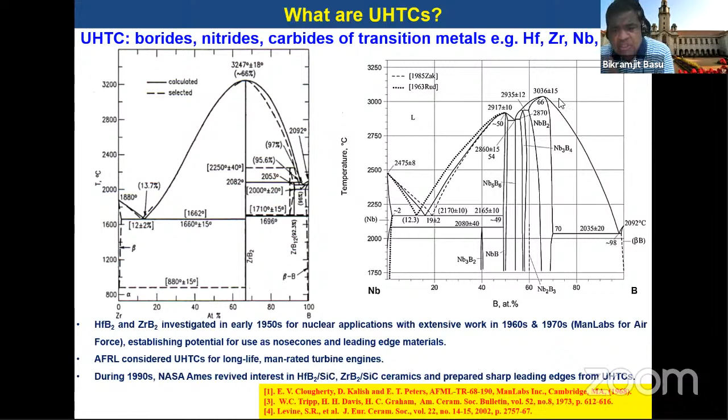made up of transition metals like zirconium, hafnium, niobium, and tantalum, for example. These are two particular phase diagrams I'm showing, just to illustrate what I'll cover in the next 10 minutes or so, the zirconium diboride system. In the ZrB system, zirconium diboride is almost a line compound, a stoichiometric composition of around 66% boron, with a melting point above 3200 degrees Celsius. Another material I'll show is niobium diboride, which is strictly speaking not a line compound, and has a melting point over 3000 degrees Celsius. These are the two materials I'll show you in the next couple of minutes.

Having said that, let me show you the national landscape, particularly ultra high temperature ceramics in India.

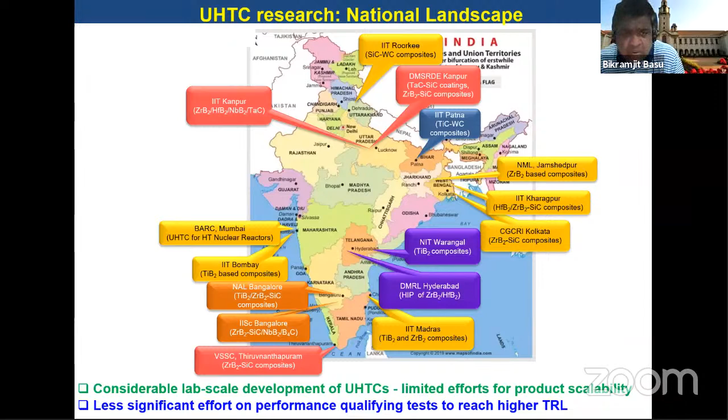I tried to put together some of the important groups at different Indian Institutes of Technology and national labs, space ISRO labs (Indian Space Research Organization), as well as some NITs (National Institutes of Technology) in India, where people are working on different types of ultra high temperature ceramics like hafnium diboride, zirconium diboride based materials, and titanium diboride based materials.

Current materials used, like ceramic matrix composites or reinforced carbon-carbon composites, have a temperature capability of 1650 degrees Celsius. A better choice, we believe, is ultra high temperature ceramics, which can sustain temperatures of more than 2000 degrees Celsius. Now, when I started this research, we first did a lot of computational analysis to rationalize the selection of materials.

In this computational analysis, we performed what we call a coupled thermostructural analysis. We used CFD code, computational fluid dynamics code, particularly 3D Reynolds-averaged Navier-Stokes equations with the Spalart-Allmaras turbulence model. The output of this computational analysis, particularly pressure and heat flux, is taken as input to the structural domain to find the von Mises stresses or principal stresses, as well as the displacement the component is expected to experience under such severe aerothermodynamic conditions.

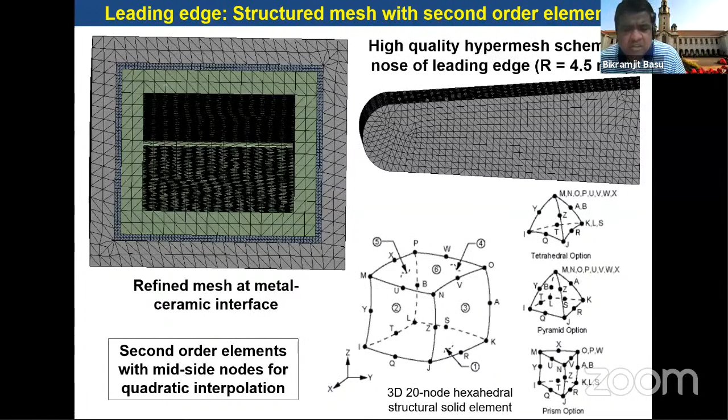Here are more details about the structural meshes we considered. We used hypermeshing to ensure a high fidelity solution could be obtained, particularly a 20-node hexahedral structural element. This is more detail about the coupled thermostructural analysis mentioned earlier - we solved this using finite element code, and this is the thermal domain used in the finite element analysis modeling.

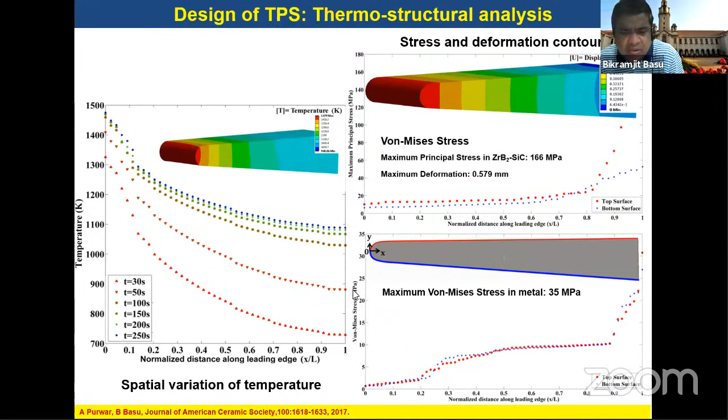Now what results did we get? If you look at the normalized distance from the leading edge, at the leading edge the temperature under this aerothermodynamic condition is expected to increase to more than 1200 to 1400 Kelvin. This is the maximum principal stress - it can go up to as high as 100 megapascals or so, reaching around 166 megapascals, with maximum deformation of 0.6 millimeters. Considering von Mises stresses, it's around 35 MPa that the titanium or underlying metal would experience.

As I said in the introductory part of this presentation, consolidation and sintering presents a serious challenge for these materials. So we used spark plasma sintering - and since the Korean National Academy of Engineering is one of the organizers here, I must say I started using this spark plasma sintering technique while visiting Professor Do-Kyung Kim's group at Seoul National University in 2002.

Thereafter, I developed this facility in India, installed at IIT Kanpur, and it still remains there. In this spark plasma sintering technique, we use a multi-step sintering technique where we hold at a temperature around 0.5 Tm, then increase the temperature and hold at a secondary holding temperature before reaching the final sintering temperature. We found that this three-stage or multi-step sintering process allows control of grain growth while enabling achievement of very high sinter density.

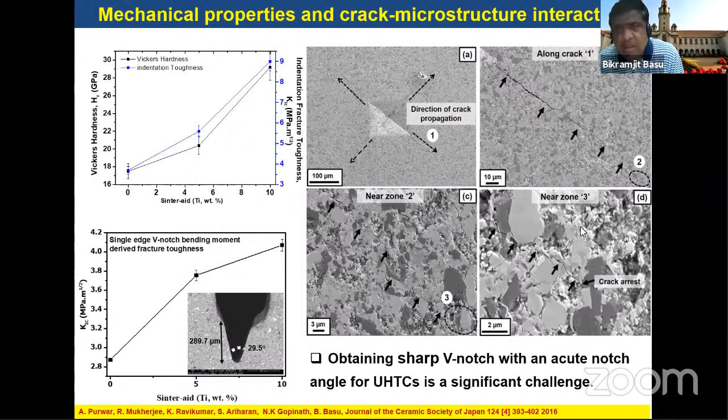As a next step, we have developed these niobium diboride-based materials very recently, following a similar processing strategy. Here we have adopted pressureless sintering technique by holding this niobium boride, which has been milled with zirconia milling media, at different temperatures up to 1750 degrees Celsius.

So essentially, what I would like to show you in the next slide is that this defect structure allows us to understand the core mechanism of densification in these niobium diboride-based materials.

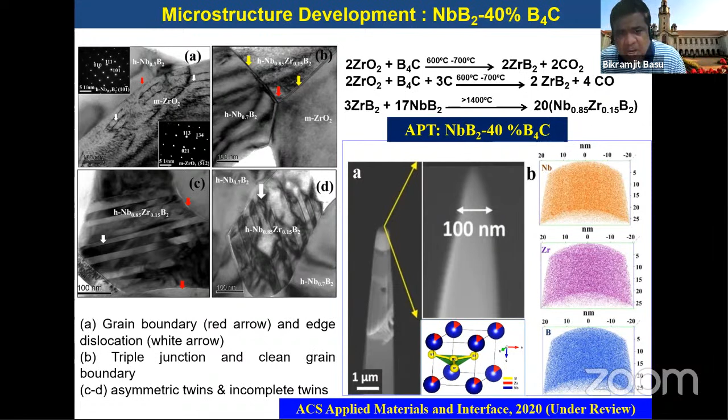Now, coming to the performance qualifying assessment of ultra-high temperature ceramics, we have used different types of testing. The first one is arc jet testing, which we carried out at the Indian Space Research Organization in Trivandrum. This arc jet test was carried out with a heat flux of 2.5 megawatt per square centimeter and an exposure time of 30 seconds.

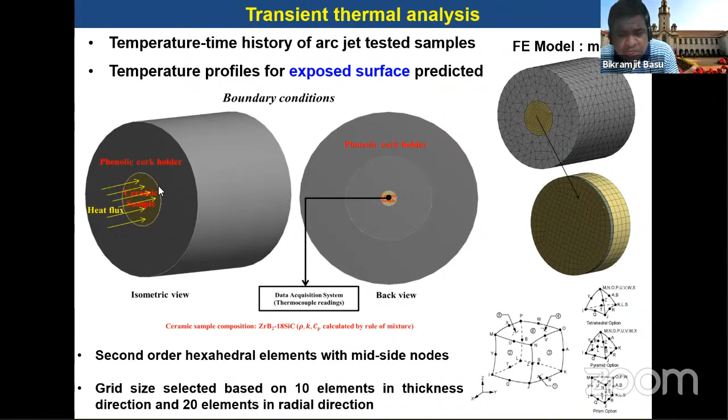This is the temperature-time history obtained from finite element analysis, and you can see that at the very front, the wall temperature can be as high as around 1200 Kelvin. So our UHTC is exposed to this kind of temperature and aggressive heat flux conditions during the arc jet testing.

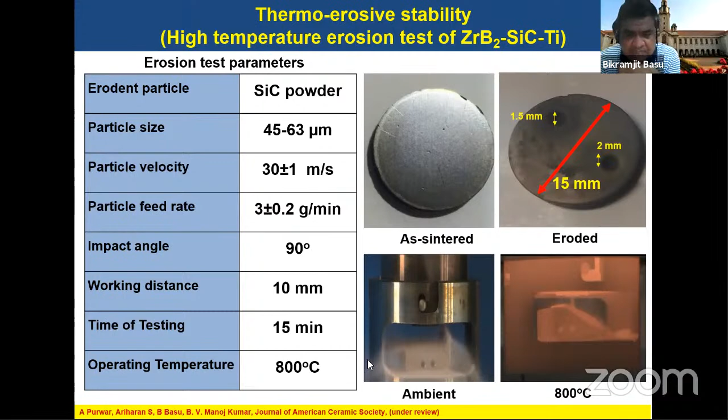Now, the second performance qualifying test that we have done is a high temperature erosion test. In view of the limitation of the experimental setup, we could not test above 1000 degrees Celsius, but we have done it at 800 degrees Celsius on the 15 millimeter diameter sample.

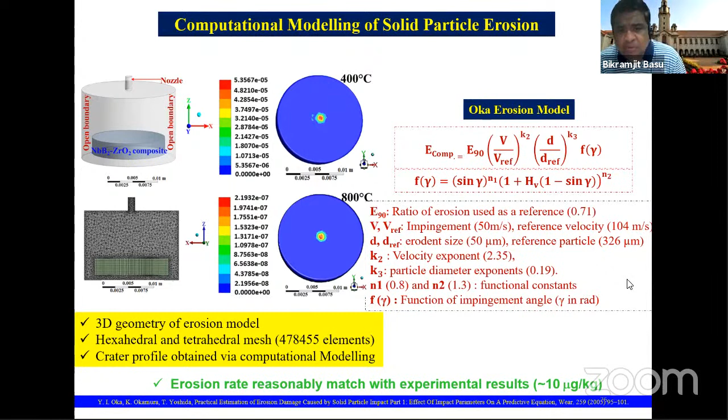We have also utilized the Oka erosion model, where we found out the theoretically predicted erosion rate of the composites by using experimentally measured values at the normal impingement angle, which is E90. V and V-reference are the impingement speed, like 50 meter per second, and reference velocity is 104 meter per second, with all parameters mentioned. What is important to note is that, following the Oka erosion model, the theoretically predicted erosion rate closely matches the experimentally measured erosion rate, at least in this case of niobium zirconia composites.

Now, when we investigated the as-eroded surfaces, we observed a couple of interesting things. One is grain pullout and flaky exfoliation, and apart from this, instead of tetragonal zirconia, we found orthorhombic zirconia present on the as-eroded surface.

This is the third and last performance qualifying test. This is what we have done at our Center of Excellence in Hypersonics at the Department of Aerospace Engineering, Indian Institute of Science, where we have used a free piston driven shock tube.

Essentially, you pull this 20 kg steel piston in the reservoir. Once you release this piston, it will impact this aluminum diaphragm, which bursts, and after rupture it looks like this. Then the shock wave travels through the shock tube and impinges or impacts on the zirconium diboride or niobium diboride sample, whichever you keep at the flange at this end of the sample.

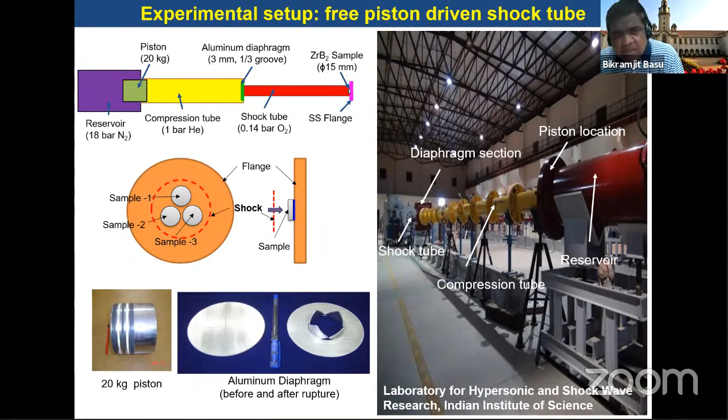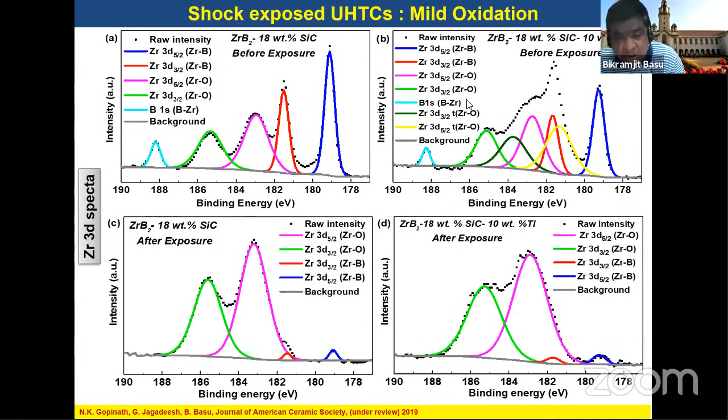Remember, this material experiences this kind of shock pressure over a time scale of a few milliseconds, less than 5 milliseconds. Now, we have done this hypersonic shock test on the zirconium diboride based materials, and found very few nodules of zirconia present after exposure. We subsequently performed X-ray photoelectron spectroscopy analysis to show that it is zirconium oxide present, which is essentially a result of oxidation of zirconium diboride, but their presence is not very significant, I must say.

We have also extended our niobium diboride work using a detonation-driven shock test. This is a little bit of a miniature model, not like the high-pressure shock tube model. Using this particular test facility, again at the Aerospace Engineering Department of IISc, we modeled the expected temperature and pressure at the shock material interface, and the total heat flux.

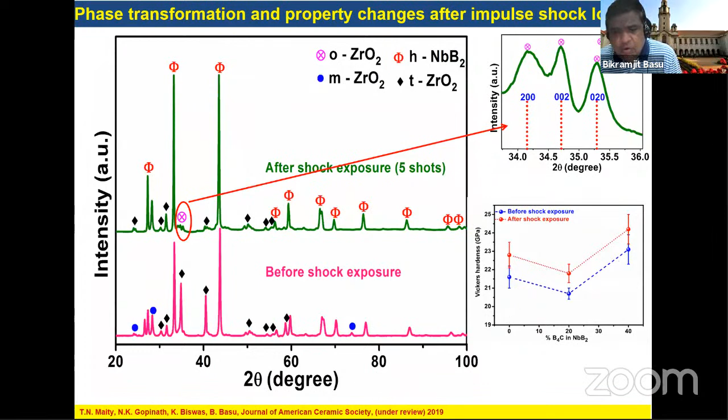Now, interestingly, in case of... yeah, 2 minutes. Yeah, I'll just keep it.

So now I'll move on to 3D printing of ceramics. This is what we are planning to do. We are planning to see whether zirconium diboride and some of these ultra-high temperature ceramics can be printed using a 3D printer. This ceramic 3D printer is based on the principle that you can utilize and mix a photocurable resin with the powder, then cure it and do layer-by-layer deposition.

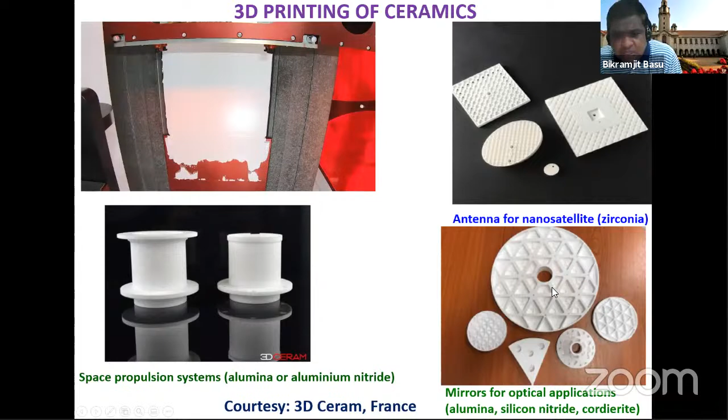This particular company, 3D Ceram France, has shown that this printer can be used to print different components for space propulsion systems, mirrors for optical applications, as well as antennas for nanosatellite applications. This is very unique, but the crux of this technology is the composition of the photocurable resin.

Before I conclude, I would like to mention some activity in the private defense startup sector. This is one of India's fastest-growing private defense startups in the hypersonic glide vehicle domain, HTNP Industries. They would like to develop a hypersonic glide vehicle by combining the advantages of a cruise and ballistic missile, and they are working on that from design to materials innovation. These are the two important pillars they are looking at: one is aerodynamic design, and the second is the material system.

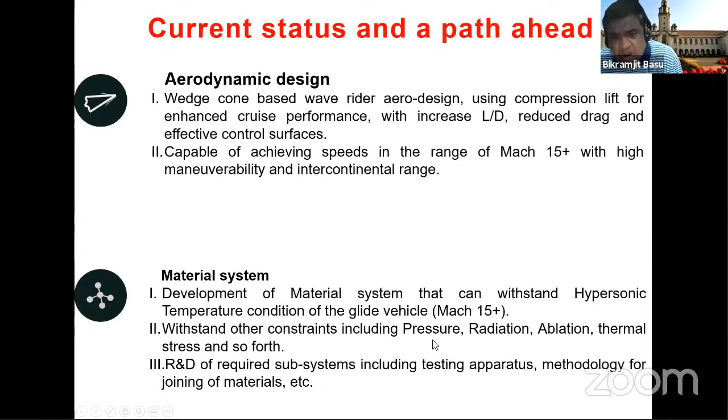This is a very ambitious program. They are planning to develop a material system for a Mach number of 15 or 15 plus. This is the core team of people working at this startup, a very young group with widely different expertise, ranging from electronics to systems engineering to material science and so on.

I'd like to acknowledge my past and present collaborators, Professor Do-Yeon Kim, who was formerly at Seoul National University, Korea, and several other people in India, as well as my alumni who have worked in this field of engineering ceramics and are currently faculty at different IITs or NITs in India. I would also like to acknowledge the funding agencies: Department of Science and Technology, Atomic Energy, DRDO, Indian Space Research Organization, and BrahMos Aerospace. Thank you very much.

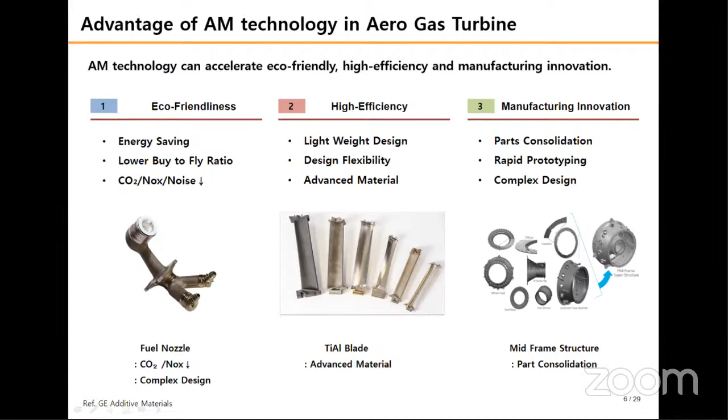This chapter introduced the AM development procedure from the design and the qualification, and the major product manufacturing process for aero engines.

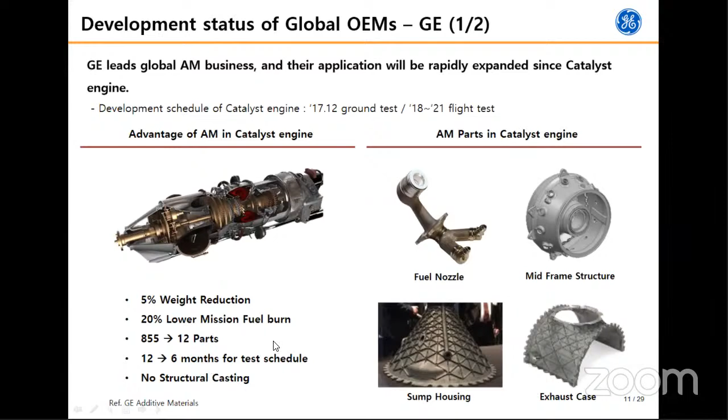Therefore, designers can get a positive margin at this point. It is very important to generate the design allowable through this kind of 3D printing process.

Rolls-Royce is also developing 3D printing parts, titanium 6 aluminum 4 vanadium bearing housing, which is applied to the Trent XWB-97K engines, and establishing design data.

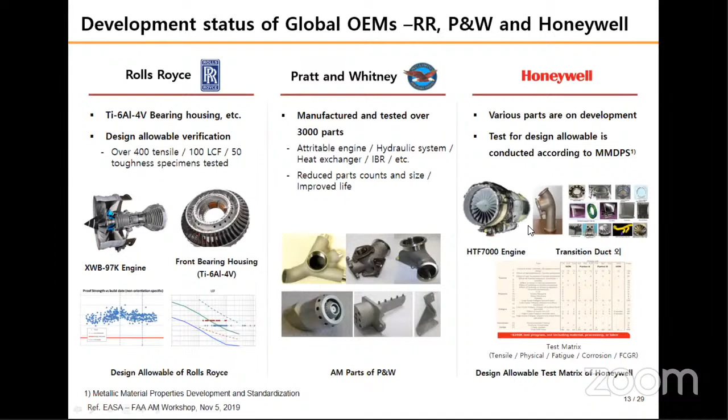Avio, the Italian company, also contributed to reducing engine weight by about 400 pounds by developing titanium aluminide for the low pressure turbine blade for GEnx engines.

This chapter introduces the history of Hanwha and the 3D printing development status of Hanwha Aerospace. Hanwha Aerospace began maintenance of aviation gas turbine engines in 1979, about 40 years ago. After that, it successfully carried out the manufacturing and assembly business of the F-110 engine.

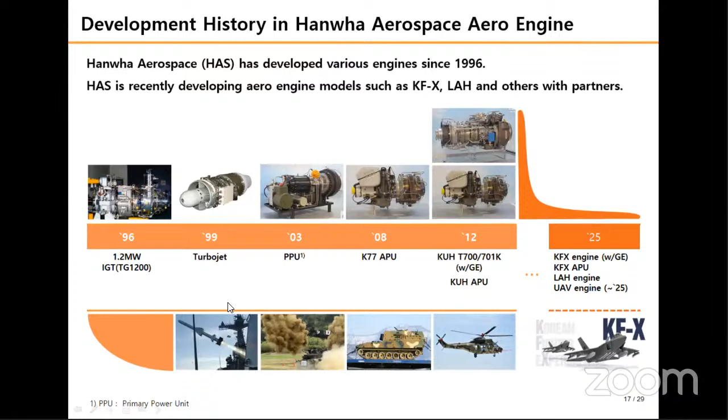Since then, the shrouded impeller applied to the industrial compressor has been developed, and recently, gas turbine combustor parts and compressor casings are being developed by the powder bed fusion process.

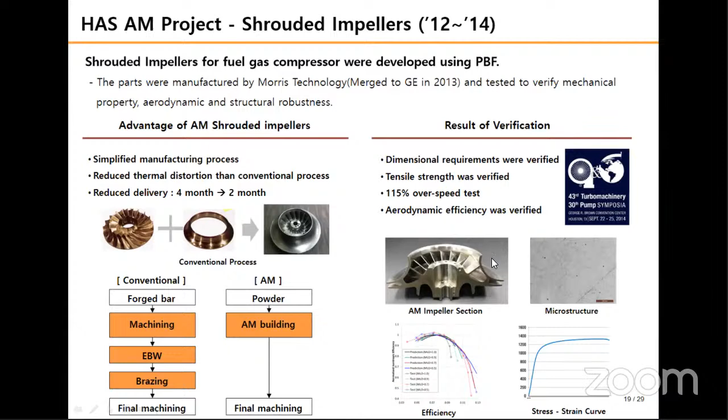From 2019, through government projects, the turbine nozzles of the industrial gas turbine F-class are being developed by applying the DFAM and PBF process at the design stage. Completion schedule is 2023. A cooling concept that can improve cooling performance is introduced by using design flexibility, which is an advantage of 3D printing. Reverse engineering is currently in progress, and mechanical tests and metallurgical analysis are being performed after manufacturing some small scale parts.

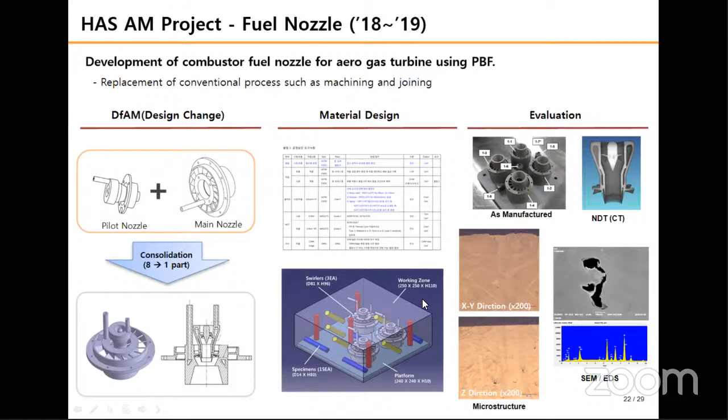Yung-Gyo, you have to conclude. Yep.

From 2009 to 2011, a 3D printed 3-stage bearing seal of the F-110 engine was developed. This is the first case of commercial development applying 3D printing technology in Korea. It was confirmed that the heat affected zone was 6 times smaller than that of conventional gas tungsten arc welding, which was excellent in terms of quality. For applications, actual engine repair and high cycle fatigue verifications were also performed. It obtained final approval from the Republic of Korea Air Force, and even now the 3D printing repair process for this part is being applied in mass production.

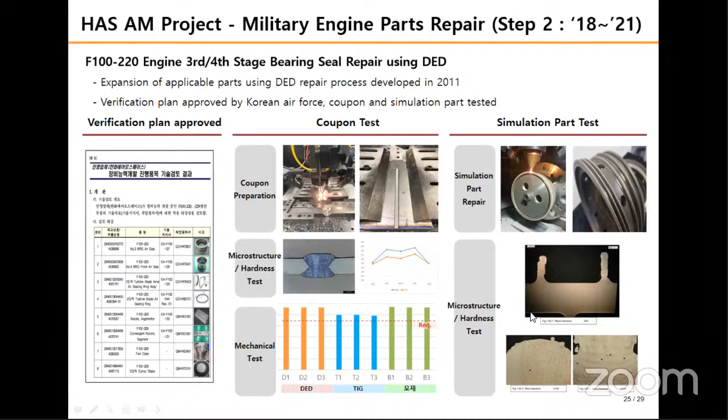Recently, the Air Force has commissioned development of bearing seals for another model of F-100 engines, and the development is ongoing. Through the government project, the target schedule for development completion is 2021. The current basic product simulation verification has been tested. For more in-depth study with the Air Force, dislocation reinforcement mechanisms, including high temperature strength and fatigue properties, are being analyzed.

Now let me give the conclusion. This slide highlights the future 3D printing development prospects. Based on the core technology secured so far, we will continue to expand the development of engine parts, and we plan to link with national development projects. Through development in collaboration with powder, process, and equipment companies, we will generate a design allowable stress database that enables design and lifetime evaluation of engines. For final mass production, we aim to establish a supply chain by securing relevant quality standards in our Hanwha Aerospace standard.

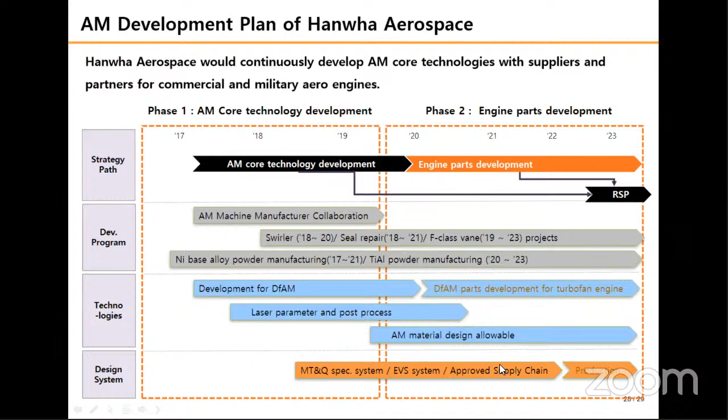This is the final point: the 3D printing AM process will continue to grow in the aviation industry in the future because it has superior advantages over existing casting and forging processes in terms of quality, delivery, and cost. For this, collaboration in design, building process, post-processing, and characteristic analysis is very important. Hanwha Aerospace will do our best to commercialize 3D printing parts like global OEMs.

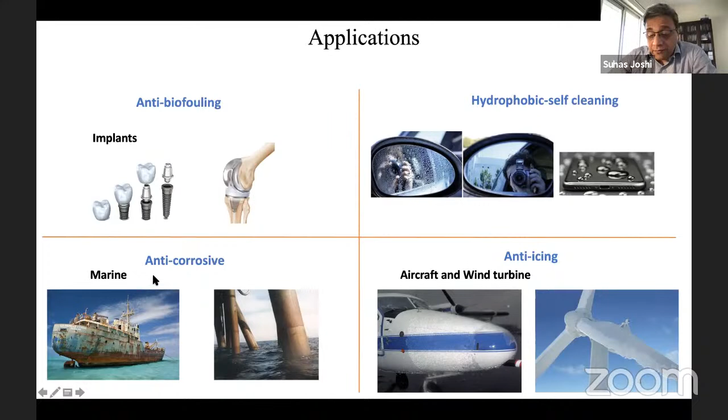Other direct applications include anti-biofouling on implants, aircraft wings and turbines for anti-icing kind of structures, hydrophobic and self-cleaning kind of structures, and anti-corrosive kind of structures. So texturing has wide applications.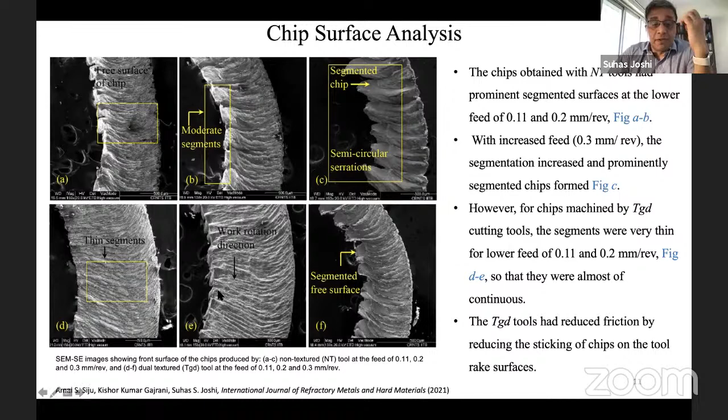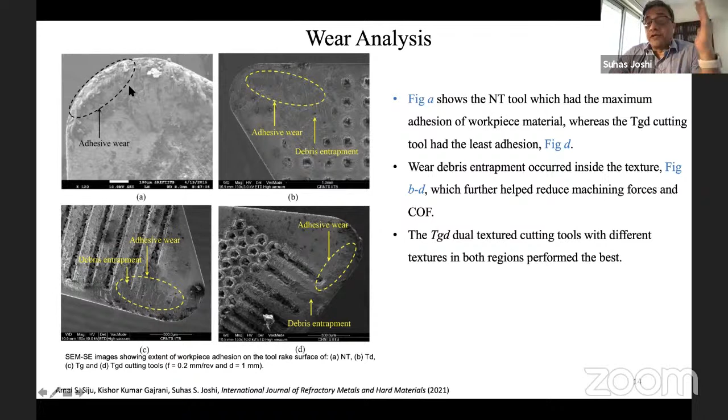Adhesion also gets reduced. The first figure is the non-textured tool, and you find there is a significant amount of material addition on the surfaces, which changes the geometry of the tool.

The built-up edge which is formed actually slips over during the machining process, and it spills particles onto the machined surfaces. So the best one surviving in such harsh conditions is the dual textured kind of tool.

I'll go to the next section. I'm just repeating this particular slide of the methodology, where we are doing something called a pulse overlap, that the pulses are overlapped on each other, ranging from 25% to 90%. And then we are doing the pulse overlap and the line overlap. Pulse is along one line and the line second overlap, so the lines are also overlapped and pulses are also overlapped.

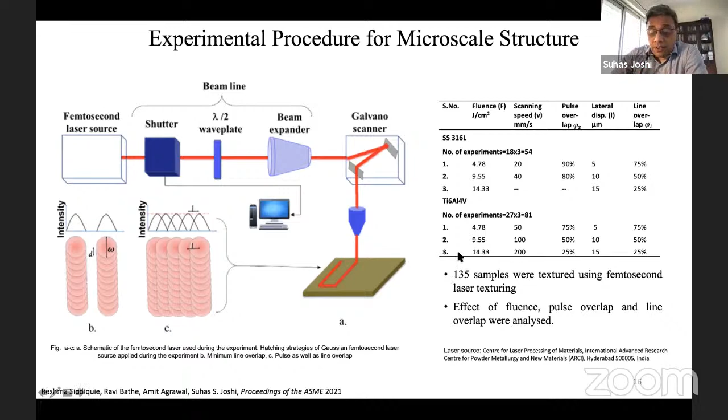If you see the surface roughness, you will find that a greater surface roughness is produced on the stainless steel samples compared to the titanium because of their inherent strengths.

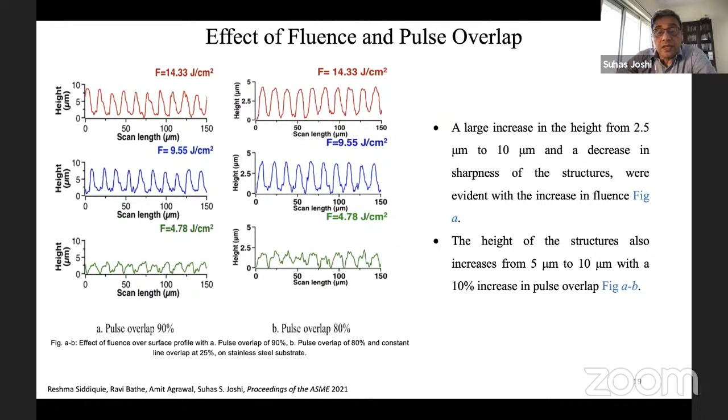Again, as I mentioned, the contact angle decreases on the stainless steel surface, whereas on the titanium surface, again the contact angle also decreases with the line overlap. Whereas with the pulse overlap, the contact angle increases.

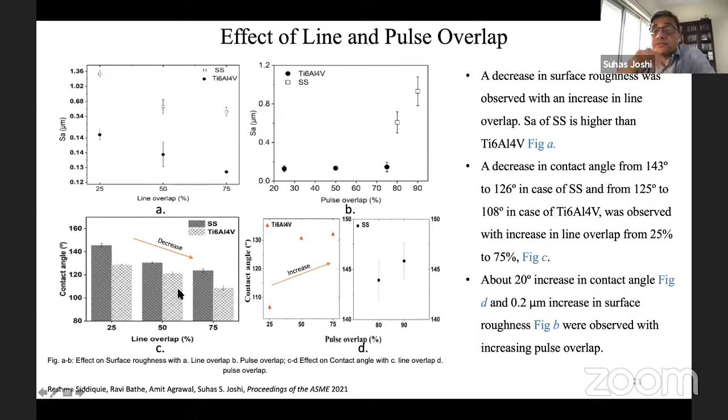So when you do pulse overlap one after another, then you have a larger roughness. But when you do line overlaps, one line overlapped with the other line, then you have less roughness on the surface, and that reduces the contact angle.

So here it gives some more idea about the periodic structures, but these are not only periodic structures - on top of the periodic structures, you find that there are multi-scale, nanoscale structures. So microscale structures at the bottom and nanoscale structures on top of it. These are like one structure superimposed over another.

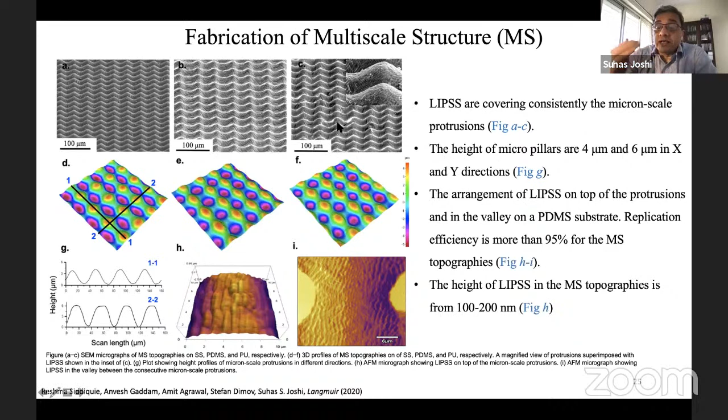This is again possible by means of the scanning strategy - that is, pulse and line overlaps, and then multiple scanning on the same surfaces by the lasers, modulating the energies and modulating the pulse intensities, so you can create the multi-scale structures. You will find that these multi-scale structures have much superior properties compared to the other surfaces.

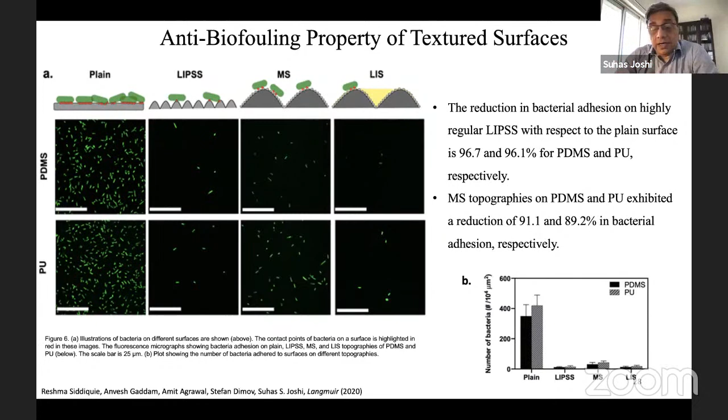Many of these properties, like contact angle or hydrophobicity and anti-biofouling properties, primarily depend on the initial microstructure of the initial texturing of the surfaces. So simply testing the contact angle gives a good idea of whether it will have hydrophobic properties, sliding durability, etc. But here we have tested anti-biofouling properties.

I would like to conclude by saying that various micro, nano, and multi-scale structures have been fabricated using laser micromachining, and they have a variety of applications, from the aerospace industries to food packaging industries and so on. Thank you for your attention.

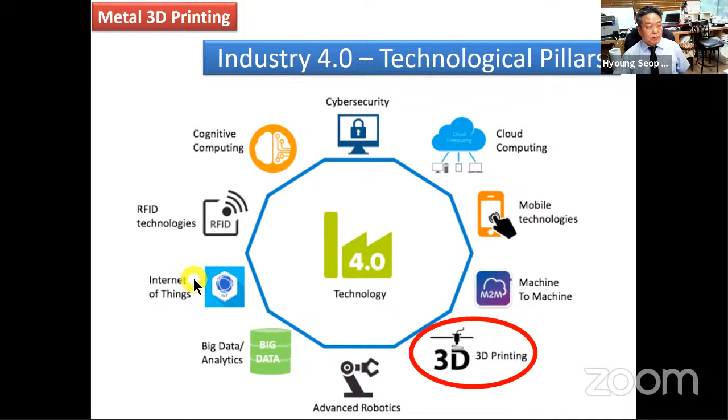We are now in the state of the fourth industrial revolution, or Industry 4.0, based on digital technology. There are 10 technological pillars in Industry 4.0, and 3D printing is one of them. In addition, according to the MIT Technology Review, metal 3D printing is first in the list of 10 breakthrough technologies in 2018. So metal 3D printing, officially metal additive manufacturing, MAM, is getting great attention in most manufacturing and application industries, including aerospace. That's why we are here today in section 3, additive manufacturing for the aerospace industry.

This slide is an Ashby plot, as we call it, showing the material's position in a multifunction axis, for example density versus Young's modulus. Most natural and artificial materials have a similar trend along various properties. In this case, heavy metals have high Young's modulus and vice versa. So there are big holes which cannot be achieved in single materials. For a 3-property plot, the hole is bigger.

We need to develop multifunctional materials filling this hole. A single material cannot do that. To overcome this limitation, Professor Ashby proposed so-called architectured materials, shortly ArchiMat. It's composed of multi-materials with 4 geometry families. Interestingly, empty space as well as real material is regarded as a component of ArchiMat.

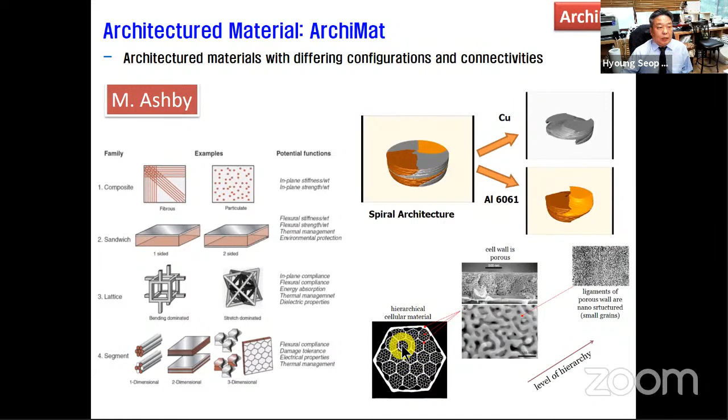The second keyword is well-known heterostructured materials, such as harmonic materials, dual phase materials, layered materials, gradient materials, and inverse gradient materials, which can produce high-performance mechanical and functional properties like this. Heterostructured materials are the future of metallic materials, I insist, considering superior mechanical properties compared to past and present homogeneous materials. Therefore, combination of the microstructural heterogeneity and macroscopic heterogeneity can be optimum tailored metallic materials.

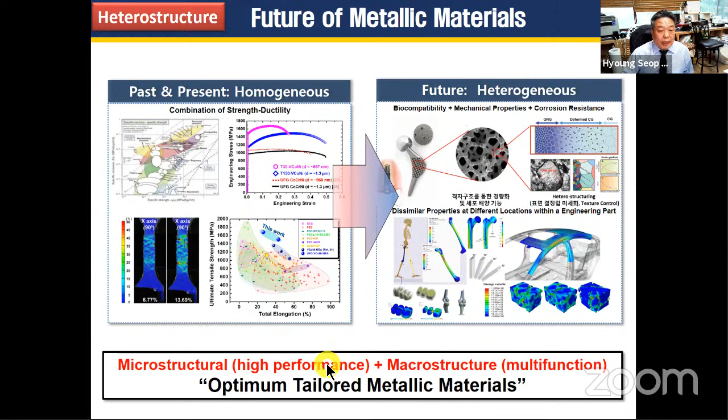High performance can be achieved by heterostructuring, and multifunctionality filling the hole in the Ashby plot can be achieved by architecturing. By combining these two concepts, hetero microstructures and macro architecturing, the hetero architecture with tailored extreme performance can be achieved.

Then how can we produce these ArchiMats? It's a problem. Classical processes can hardly make them. But the amazing technology of metal 3D printing has a huge degree of freedom in single in-shape design. So it's explosively growing from fundamental research, the number of publications per year, to application and markets is explosively increasing.

I have two metal 3D printing machines in my lab. The first one is DED, direct energy deposition type, a Korean machine. Unique feature of this machine is we have 6 powder feeders. This is the SLM, selective laser melting type, GE, General Electric Concept Laser machine.

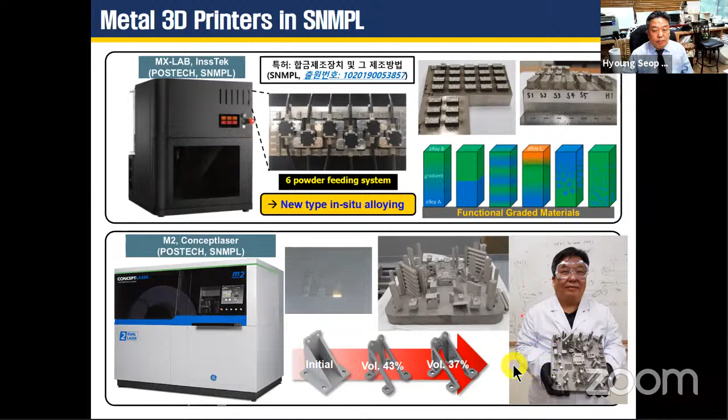With this DED machine, we can build layered, gradient, or in-situ alloys because there are many feeders of different materials. So heteromaterial can be built using this one. But today's presentation results are from samples processed by SLM in PBF, powder bed fusion type processes.

For the best performance of MAM ArchiMats, we need to understand the relationship between processing, structure, and properties. This is called PSP linkage. It's very complicated, but we need to understand it.

For heterostructuring, at present, a powder metallurgy process for harmonic structural material and severe plastic deformation process for surface gradient materials are widely used. But the control parameters are very limited - only grain size, grain size distribution, alignment, rotation, and something like that.

But MAM has much more controllable variables and features from nano to micro to macro, like this. Hence, we have a much wider window, not only for shape design, but also for material properties.

One unique feature of MAM process materials is nanoscale heterogeneity. It's called cell boundaries and cell structures. It's different from casting structures.

Interestingly, cell boundaries are composed of very high dislocation density, one order of magnitude higher than general casting structures, and very high solute segregation. This cell boundary hinders dislocation glide very efficiently, but not as strong as grain boundary. And this cell boundary increases strain hardening, elongation, and strength eventually.

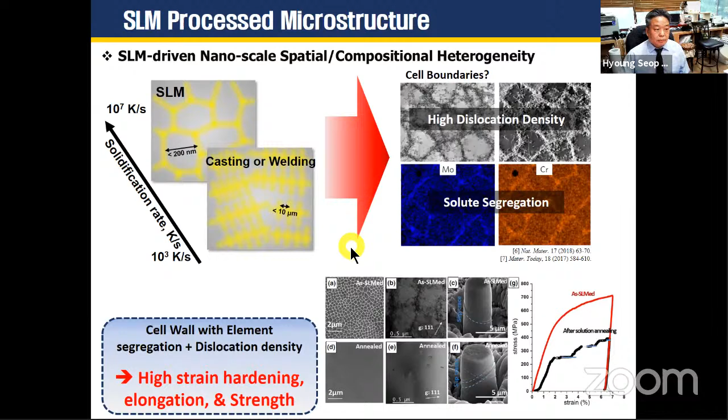So what is a high entropy alloy? High entropy alloys are defined as multicomponent single phase crystalline alloys with more than 5 elements of equimolar compositions. This configuration entropy S is higher than 1.5R - that's the definition of high entropy alloys. It's called medium entropy alloys if it's between 1R and 1.5R. R is the gas constant. Due to the very high configuration entropy effect, single phase is stable following thermodynamics.

HEA has very good powder and liquid flow properties because of low melting temperature, being multi-material, and having a very wide single phase region. These two characteristics, low melting temperature and wide single phase range, are ideal for additive manufacturing. Plus, various elements can induce cell boundary segregation that results in superior mechanical properties in AM parts. So high entropy alloys are excellent candidates for additive manufacturing material.

This slide shows the typical EBSD OIM at various directions. The Z direction is the building direction, and we see well-developed cell structures here. Look at the scale, it's 2 micrometers, so one grain is much bigger than these cell structures.

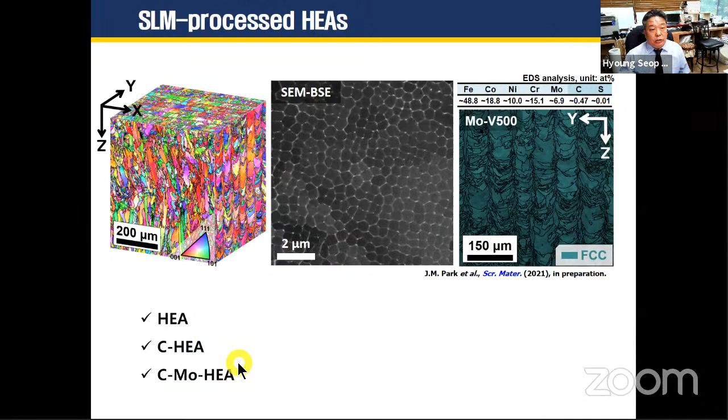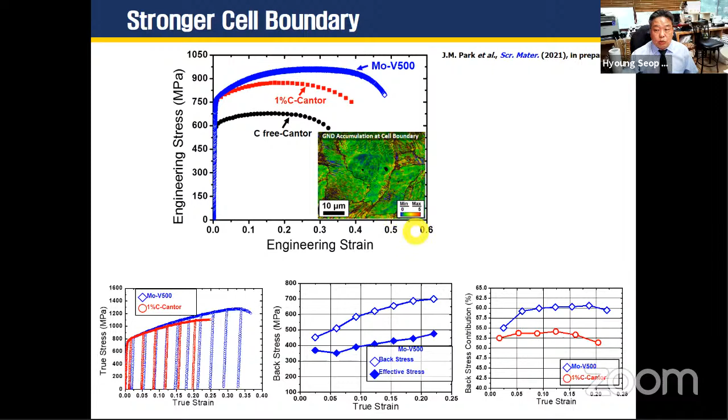We can see this in the EBSD. GND, geometrically necessary dislocations, shown in blue and yellow color in this EBSD, reside near the cell wall, as seen in TKD - transmission Kikuchi diffraction analysis, not shown here, which can show much smaller, TEM-based, geometrically necessary dislocations like this.

The microstructure and HDI strengthening mechanism based constitutive model, considering GND, geometrically necessary dislocations, as the source of back stress and HDI strengthening, and forward strengthening as well as SSD, was developed.

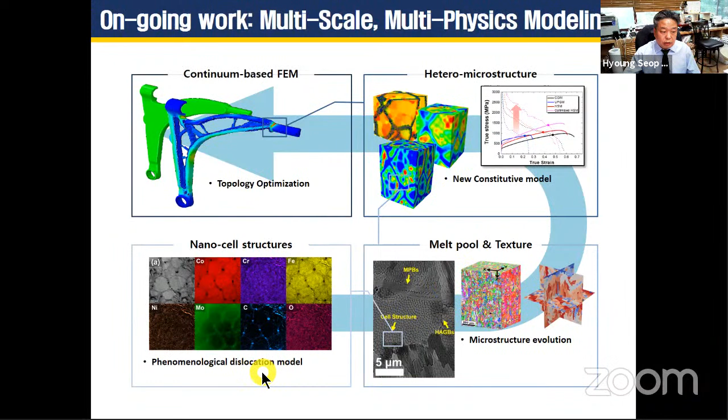With this approach, combining experimental work with modeling and simulation, considering microstructure and deformation mechanisms unique to high entropy alloys and additively manufactured metallic materials, we expect numerous applications of heterostructured MAM materials in aerospace, medical, transportation, and defense industries. We hope to develop a bright future using this material and these amazing processes.

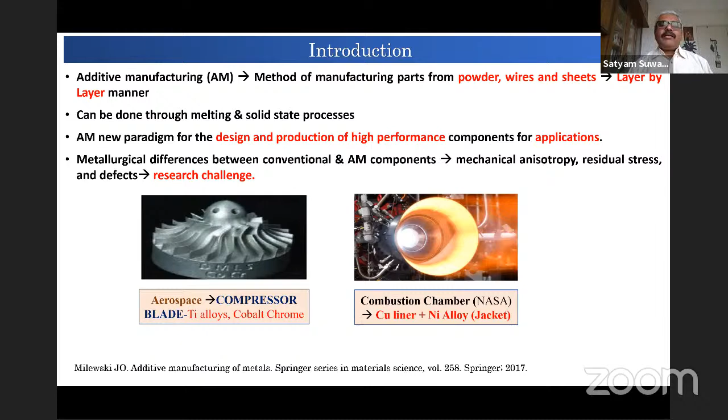The main point is that the aerospace sector has paid a lot of attention to this, because the number of processing steps are reduced, there is weight saving, fuel efficiency, expanded function and application, less lead time, and lower life cycle costs. But there are issues as well, it's not always so straightforward.

There are design complexities. Since complex designs are involved, these components require proper scrutiny after manufacturing because of their high risk levels, so post-process inspection is very important. Destructive inspection and certification could be costly, because here we integrate one component as a whole instead of several subsystems, so these are the flip side of additive manufacturing.

For repair applications, destructive testing is not possible, and again, qualification of these components as per their airworthiness criteria is very difficult.

As of now, there has been a lot of work, including on high entropy alloys, which Professor Kim had just shown. But the main volume of work on AM comprises aluminum alloy, particularly the composition aluminum-silicon-10 magnesium. Iron-based alloys have been extensively worked on, primarily tool steels and 316L stainless steel. Nickel-based alloys are the most favorite alloys for additive manufacturing.

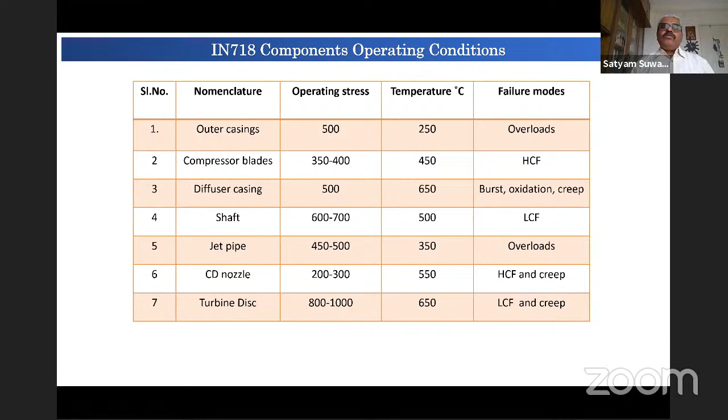Now, the main problem is related to the manufacturing of these components. Porosity is a very important negative attribute to this process, because these are mainly powder-based processes, and all these powder-based processes are associated with some amount of residual porosities.

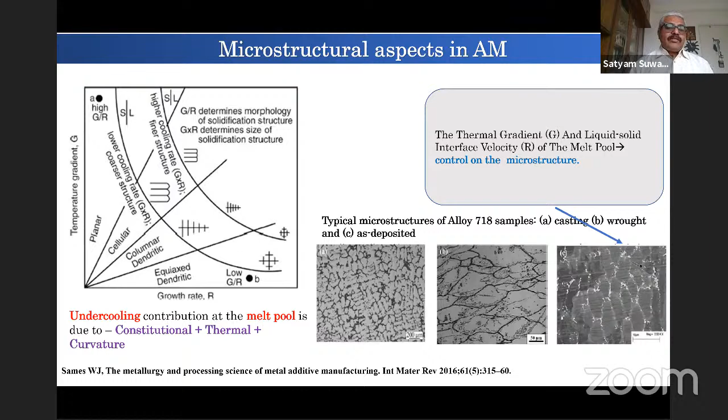Most important for material scientists in additive manufacturing is microstructural control. In Inconel 718, which is an age-old material used for almost 50 years in aero engines, there are subtle microstructural differences compared to conventional cast, wrought, and additively manufactured material, as mentioned in Professor Kim's talk—these segregations are very common features of additively manufactured materials, and they also lead to some precipitate stability issues that have to be handled. The proper general microstructural morphology has to be addressed, leading to very precise control of parameters.

So we carried out investigation into which process is the most suitable one, because there are several processes of additive manufacturing now. Which one is the better one? We made some initial investigation.

We got Inconel 718 by electron beam melting and selective laser melting methods, and we almost optimized the parameters in both cases to the best possible density available. With variation of parameters we made these materials, and these are the results shown on the best output of these materials—we could see a subtle difference between EBM and SLM.

Microstructures are characteristic of the cooling rates encountered during the processes, but in both cases we have a cell structure more pronounced in selective laser melting, with a more lamellar type microstructure. Melt pool boundaries are more pertinent in SLM than in EBM. EBM is a very important process because we can keep the substrate at a higher temperature generally, which leads to very precise control of microstructural features by controlling the cooling rate.

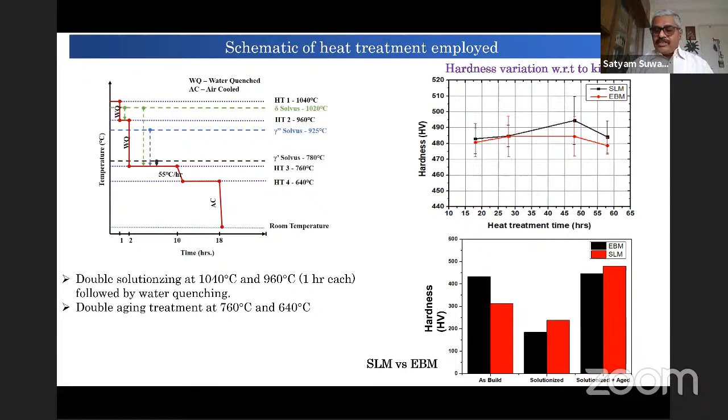Considering all these parameters, we had to design heat treatment strategies, and we carried this out for both SLM and EBM materials, observing the property differences and property stabilization for all these conditions. Microstructural features are also very characteristic.

In the next few slides I will show a very important aspect of this. Microstructures in EBM conditions generally have one kind of orientation. We work quite a lot on textures, so we know orientations are very important, and for EBM cases we were able to stabilize certain orientations compared to SLM, which was a little more random even after the heat treatments.

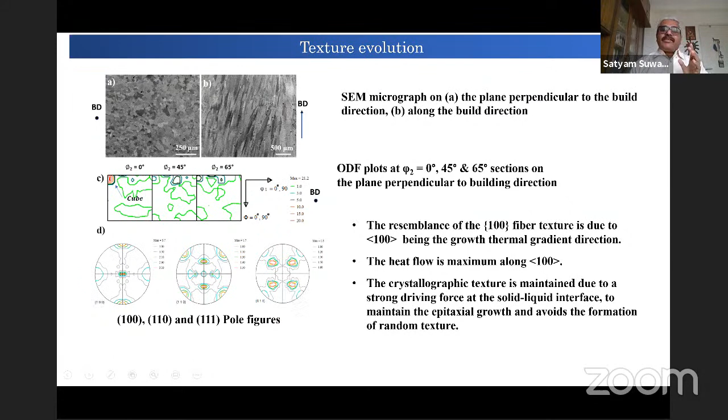Considering the texture evolution of these processes, we have seen that in EBM condition we get a perfect cube texture, and this paves the way for a very important thing. One aspect is the precipitate segregation at grain boundaries, as we have seen, but most important is the possibility of going towards a feature similar to single crystal or directional solidification type. I will show you in a short while how this has helped us.

And of course, the heat treatment leads to different kinds of phase stabilities in this condition.

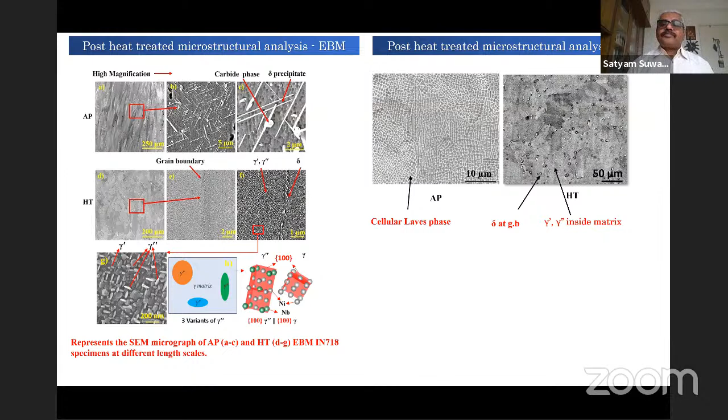Evaluating mechanical properties, we have realized that we have differences in heat treated conditions of both these materials from their as-printed counterparts. So adequate heat treatment is a necessity for each of these processes separately, and no common thing can be prescribed for both. We have seen subtle differences in terms of heat treatment conditions, which have to be optimized based on the stability of precipitates, as we have done in this case. There is also a subtle difference in that the bottom layer undergoes multiple heat treatments compared to the top layer by the time it is built, so this variable has to be taken into account.

Now there is a secret behind EBM. The success of the EBM process is that a very common type of texture is formed, and we can generate some kind of single crystal type of structure by EBM, which is another attribute important for gas turbine materials, particularly for blades used in single crystalline conditions. By controlling the cooling conditions, which are much better controlled in this case, we can very well control the orientation of these materials.

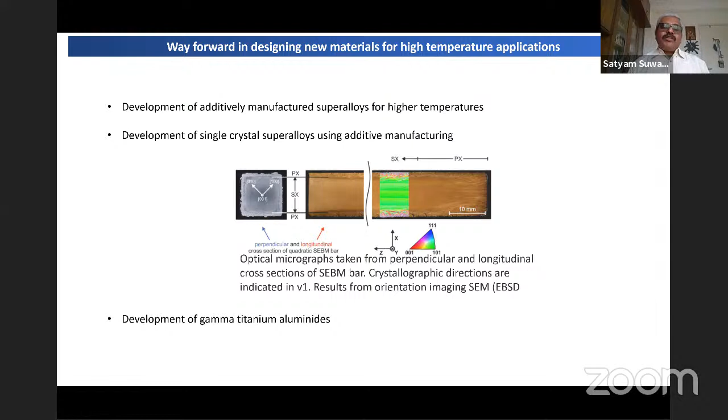And of course, gamma titanium aluminide, which always appears and disappears because of poor fabricability. Here we have an opportunity to optimize the process and make engineering use of gamma titanium aluminides, because the poor plasticity which impedes fabrication is no longer an issue. Only thing is microstructural control and property control is the important thing.

Heat treatment - in a few minutes I will tell how heat treatments are important even for Ti-6-4, which is another material used in the cold section of aero engine components. There also, heat treatments need to be suitably designed.

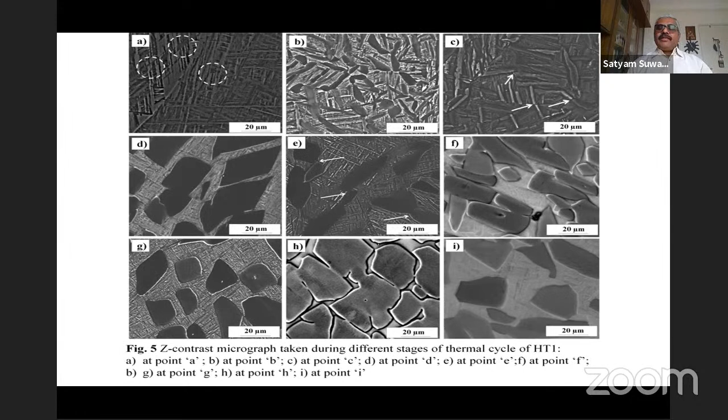We have done it, and we have seen that a specially designed heat treatment leads to equiaxed microstructure, because due to very fast cooling rates we get a martensitic structure, which has to be converted into equiaxed structure through a very subtle, specially designed heat treatment. That gives lots of opportunities for metallurgists to play around with the additive manufacturing process. Property differences in all these cases are also sensitive to direction - whether it's vertically built or horizontally built, heat treated or non-heat treated. All these are very important parameters.

I'm just showing this - a very important thing I wanted to bring in is surface treatment. As I said, we all started our work with severe plastic deformation. So severe plastic deformation, like surface mechanical attrition treatment, has been found very effective for enhancing the properties of Ti-6-4, because it closes surface porosity, generates compressive residual stresses, and eventually leads to very optimal fatigue life of these components.

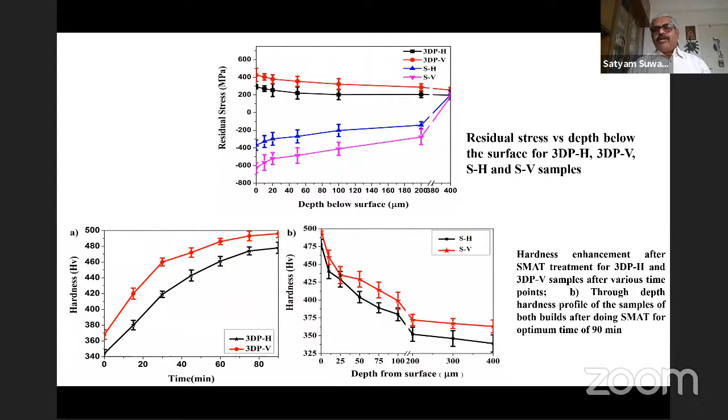Regarding residual stresses, we can see that just by doing this post-processing, it totally changes from tensile to compressive nature, and its effects are seen in all the properties. Fatigue life is substantially enhanced, and the fracture mode is changed by this process. So what I mean to say is very new and innovative post-processing treatments have to be invented for the entire range of materials in this case.

Now, just before I close, I wanted to give a glimpse of our work on high entropy alloys, because the tone was set by Professor Kim in the previous presentation. We worked on eutectic high temperature, high entropy alloys, which are supposed to be potential candidates for replacing some of the superalloys that we have mentioned.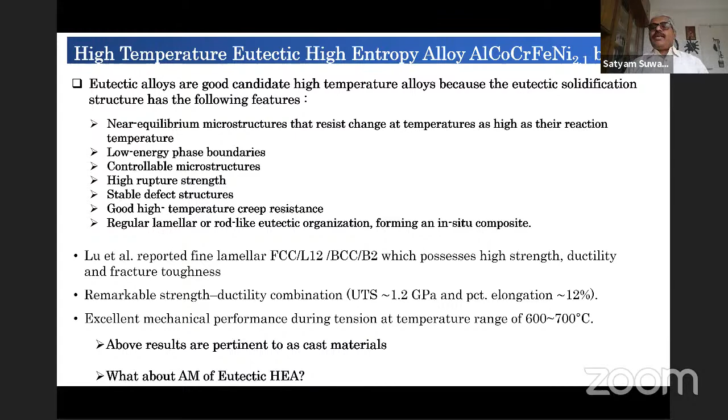We worked on this well-established high entropy alloy - aluminum, cobalt, chromium, iron, and nickel, 2.1 composition - and we did this by additive manufacturing, following all these methods. Because of the process attributes, we got this lamellar plus dendritic structure in a eutectic form.

We carried out thorough characterization of this, and we could stabilize the BCC phase and L12 ordered phase and BCC disordered phase as a result of additive manufacturing, which was slightly different from what it is generally made by casting route. In that case, the FCC phase is disordered and BCC phase is in B2, but as additively manufactured material has ordered FCC and disordered BCC phase.

We carried out the interfaces. We could see the absence of diffused interface in both cases by atom probe analysis, and we could ensure that there was no additional phase formation. The phases were only L12 and BCC there.

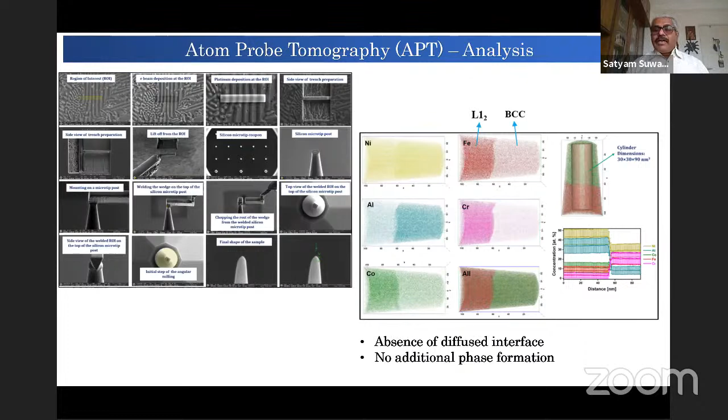These materials have shown very nice properties at higher temperatures. The strength increases up to 600 degrees, generally up to 600 degrees it can be used. So the strength increases with temperature, and then it substantially decreases. So that sets, for this particular composition, the temperature range of operation for this material.

We could also examine the orientation relationship in these alloys, and we could see that there is a Kurdjumov-Sachs orientation relationship between these two phases initially present in the material.

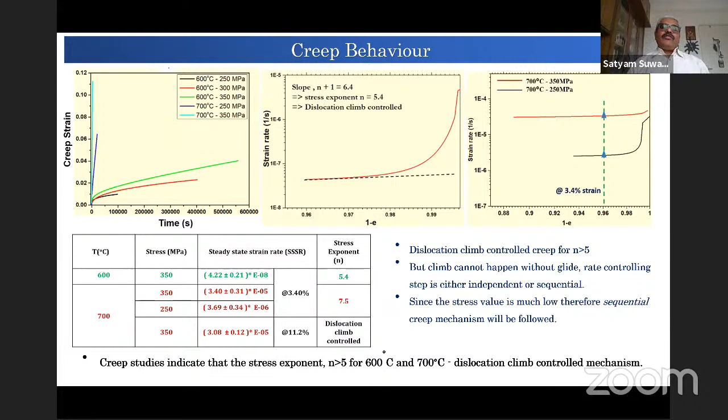We examined the creep behavior, and we could see the nature of creep mechanisms at 600 and 700 degrees in these conditions. We also carried out post-deformation creep analysis, and we could see that a weak texture formed, the orientation relationship weakens, and the L12 phase develops a very strong texture in this case.

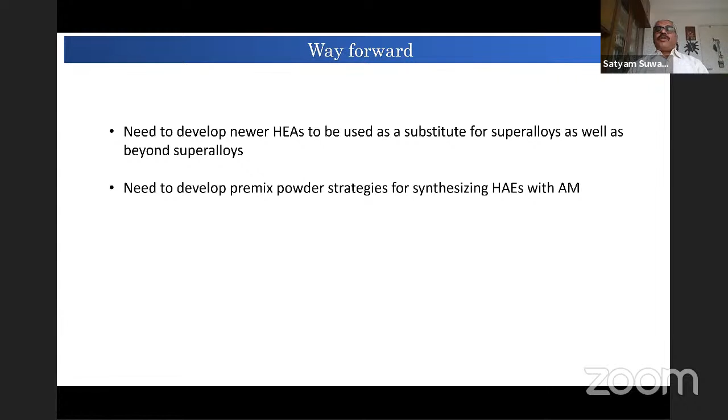So the way forward in this area is we need to develop new high entropy alloys which can be used as substitutes for super alloys, and as well as beyond super alloys, because by additive manufacturing process, we have a window of opportunity to do a lot of alloying additions and generate components and test them, so that they are more suitable property-wise, better off than existing materials.

So with this, I complete my talk. I acknowledge all my students, collaborators, and funding agencies.

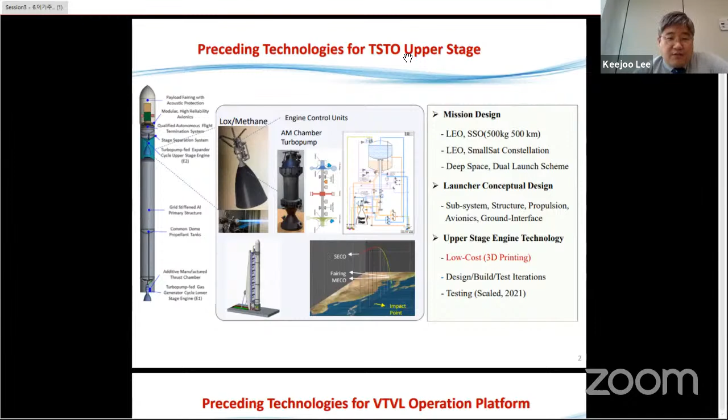For example, our team member came up with a great idea of having both liquid oxygen cooling channel and liquid methane cooling channel in an alternate fashion, instead of using liquid methane only as a coolant, which is probably hard to build even a prototype in a traditional sense, as the design cannot be easily verified and it may require several costly and iterative processes.

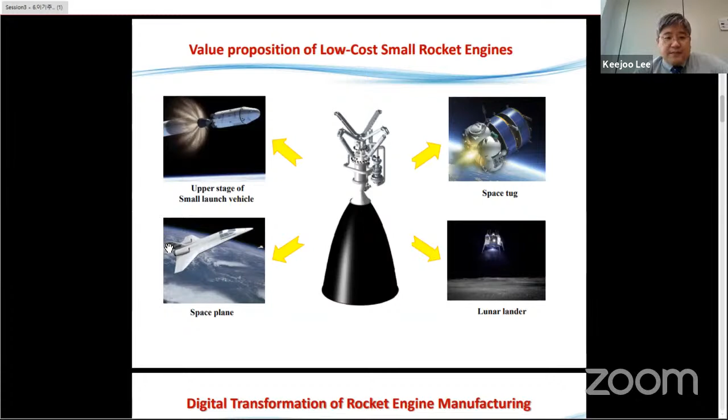We strongly believe that combustion chamber, shown in the center, is the engine component that can get us the greatest value out of additive manufacturing. The combustion chamber is composed of mixing head at the top and regeneratively cooled cylinder and nozzle section below the mixing head, which is a very complex internal structure, meaning that it requires a lengthy process of machining and welding if we use traditional manufacturing method.

By introducing additive manufacturing, where you can selectively melt powder in a bed layer by layer, we can design and build an integrated mixing head as a single component. We can not only reduce the number of parts significantly, but also shorten the manufacturing process from 6 months to 1 year down to 2 to 4 weeks. Of course, this is only true if the printing recipes are tested out and proven.

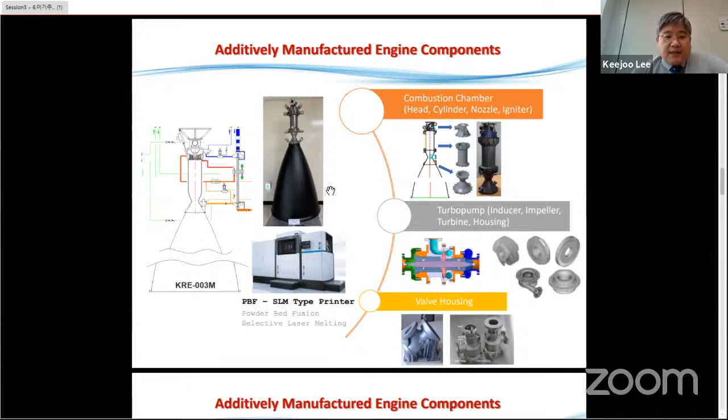Unfortunately I can't share the video, but for the combustion chamber we used metal 3D printers of two different sizes, depending on the component dimensions. For example, the cylinder part in the middle requires a printer that provides a build height of approximately 400 millimeters, while the head and nozzle can be printed using a smaller printer. Also, you'll notice that sometimes they use more than one laser to speed up the building process, as shown in the middle.

In case you're not familiar with combustion chambers, you might think the cylinder and nozzle don't have a complex shape since they're mostly symmetric. They actually have internal channels to cool down the inner wall of the combustion chamber, which makes it extremely hard to manufacture in a traditional way. I'll show you the channel in the next slide.

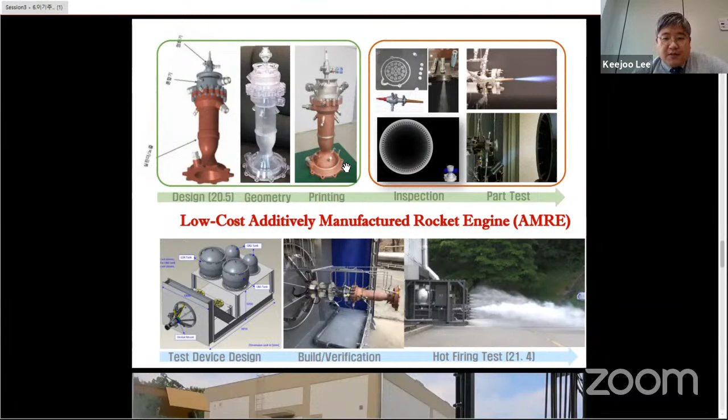I was supposed to show the video of a hot firing test. Basically it's a 10-second hot firing test we conducted this month, a few weeks ago. Last week, we disassembled the combustion chamber made of copper alloy after the test and found the internal channel and injectors are in good condition. We also plan to increase the burn time incrementally and analyze performance data.

Subsequently, we will switch to the mixing head design number 2, which has a slightly different injector design. I think this kind of fast design iteration is only possible because we use 3D printing.

I'd like to touch on how we use additive manufacturing to implement a novel idea into a product. We typically use fuel only, in our case methane, to cool the chamber body. If you decrease the thrust for landing, the mass flow of methane becomes insufficient to cool the chamber body. So the idea is to use both liquid oxygen and liquid methane to cool the chamber body to have enough mass flow. We just need to build an alternating channel for this, which is nearly unthinkable without additive manufacturing. We plan to demonstrate the deep throttling capability through a hot firing test later this year.

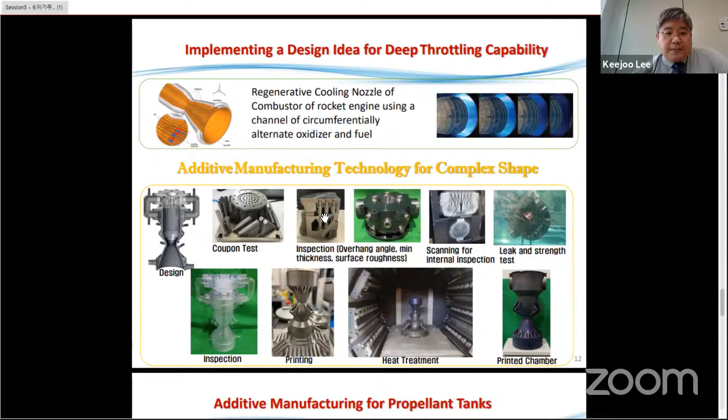We plan to extend the DED process to high pressure tanks for upper stage applications, where we intend to develop a functionally graded DED process where titanium or Inconel 718 and STS316L meet at the poles. We're also interested in developing a 3D process using aluminum alloy for a sizable upper stage tank, where a caterpillar-shaped tank is desirable for maximum capacity within a given volume. This is more of a future work we're interested in.

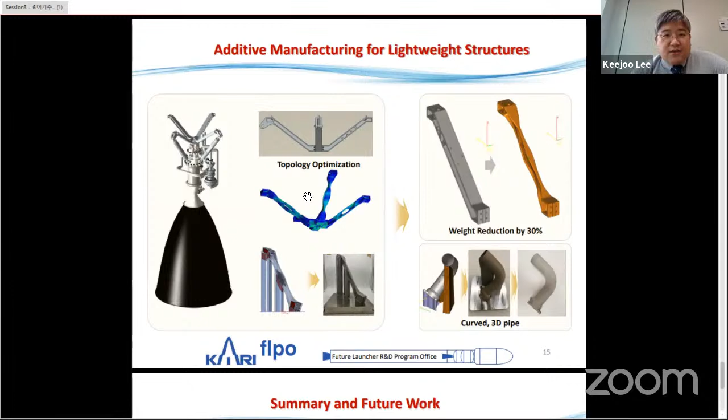Another interesting area of research is topology optimization, and actually materializing it using additive manufacturing. For example, we started with a typical engine thrust frame shown at the top, already optimized for machining. Topology optimization resulted in a cell-based complex design shown right below. We were able to reduce the weight by 30% in this case. We also plan to use additive manufacturing for curved pipe manufacturing.

I would like to summarize. Slowly, we've started embracing digital transformation of rocket technology with additive manufacturing, especially with a focus on faster innovation and complex design implementation. In my humble opinion, we still need to diversify source material, standardize the AM process and framework for quality and repeatability, and overcome the size limit before building rocket components using additive manufacturing can be put into practice. Thank you very much for your attention. Sorry for the video situation.

Thank you, Dr. Lee. You presented very well despite the initial hiccups. No problem, you completed within time. Thank you very much.